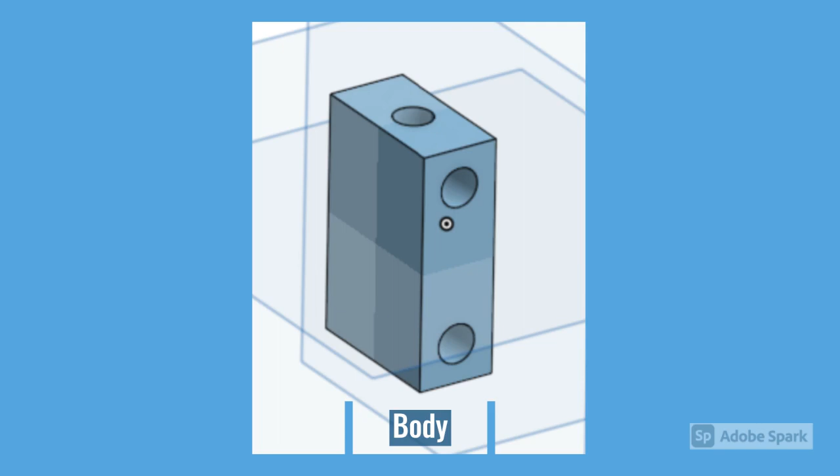It's a rectangular prism with a hole in the top for the head, and then two holes in the side for the arms and the legs. Use this dimensioned drawing to create the body of the robot. I recommend starting with a 2" by 3" rectangle and extruding that to 1 inch. This will give you most of the body.

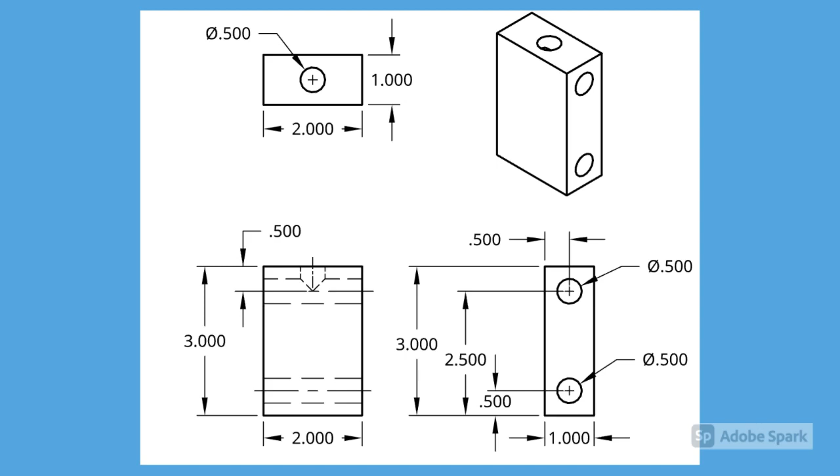Then you can add in the 3 other circles for the head, arms, and legs using circular sketches and the extrude remove tool. When you have completed the body, click on the plus sign and create a new part studio. In your new part studio, we will be creating the head of the robot. Have some fun with this part and make your own head look unique.

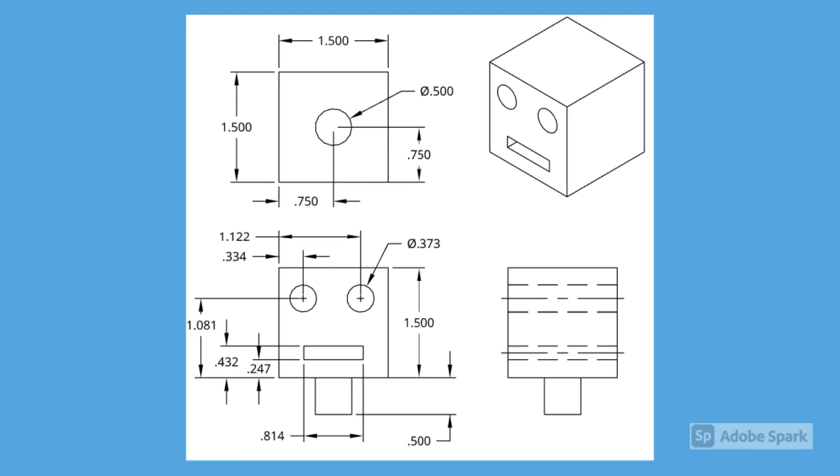Here is the dimensioned drawing for the head of the robot. I started by creating a 1.5" by 1.5" square, and then I extruded that to 1.5 inches to create a cube. I then created a sketch on the face and extrude removed the holes for the eyes and the mouth. Finally, I created a sketch on the very bottom of the cube, drew a circle, and extruded the neck.

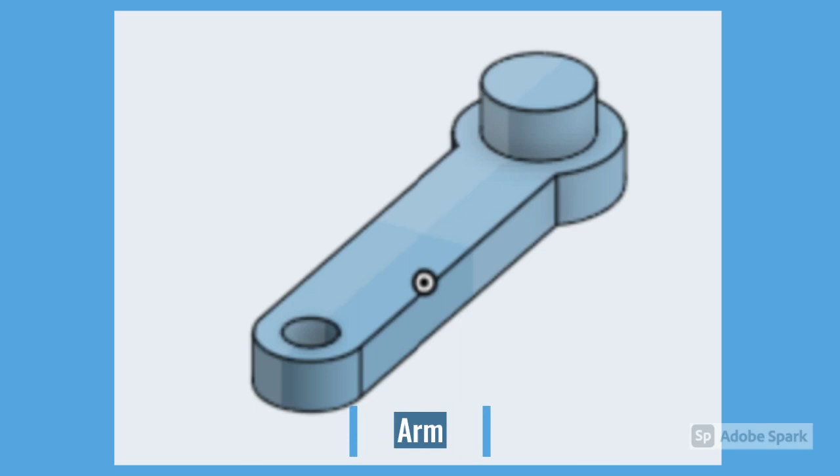When you have successfully completed the head of the robot, click on the plus sign and create a new part studio. In your third part studio, you will create the arm for the robot. Use this technical drawing to create the arm of the robot.

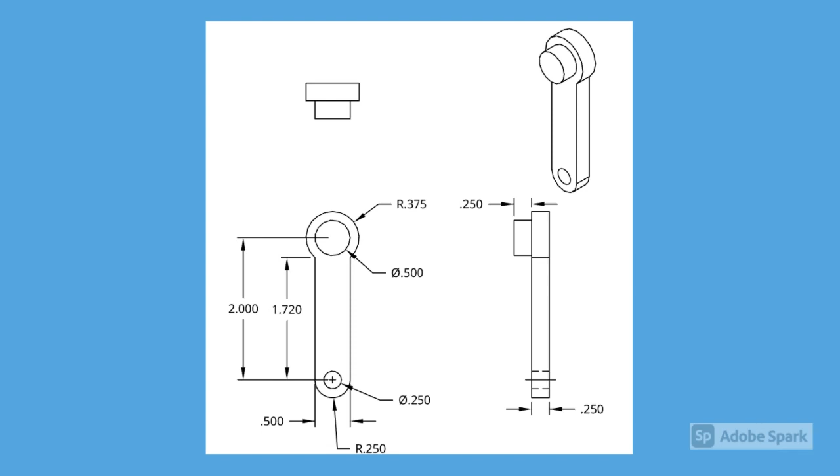I began by creating a 2" by 0.5" rectangle, and then I added a large circle at the top for the shoulder of the robot, and a small circle at the bottom for the hand of the robot. I then created a new sketch where I extruded the hole for the hand and extruded the peg for the shoulder. When you have successfully completed the arm of the robot, create a fourth part studio.

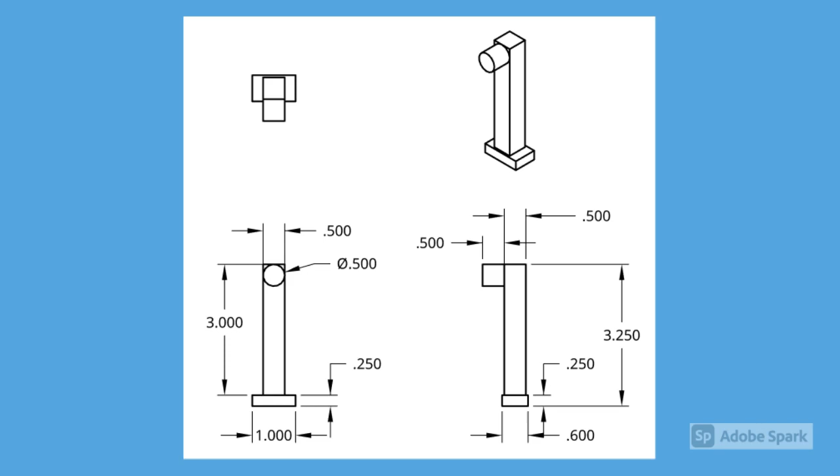The last part of the robot is the leg. Use this dimensioned drawing to create the leg of the robot. I began by sketching a 0.5" by 0.5" square and extruding it to 3 inches. Then, I created a new sketch to create the shoe for the robot and extruded that, and finally created a third sketch with a circle and extruded that for the connecting peg.

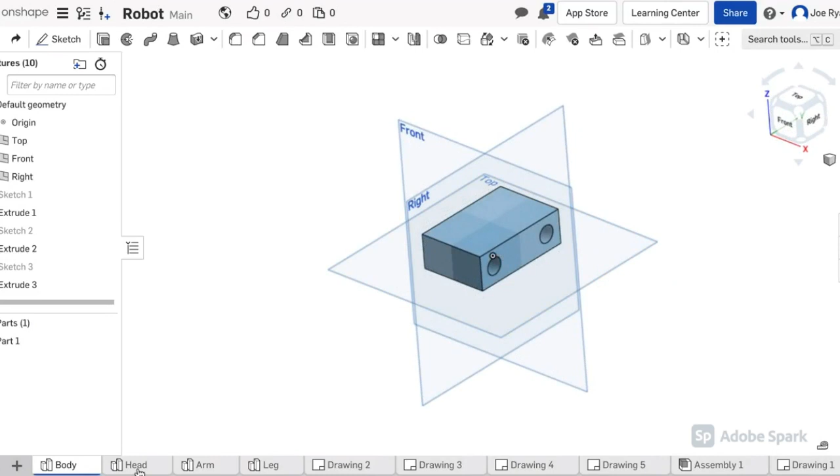Now that you have created all 4 parts of the robot, it's time to assemble it. In this section, we'll learn how to use the assembly feature in Onshape. So far, you should have created the body of the robot in Onshape. It should look something like this. Additionally, you should have created a part for the head of the robot that looks like this part.

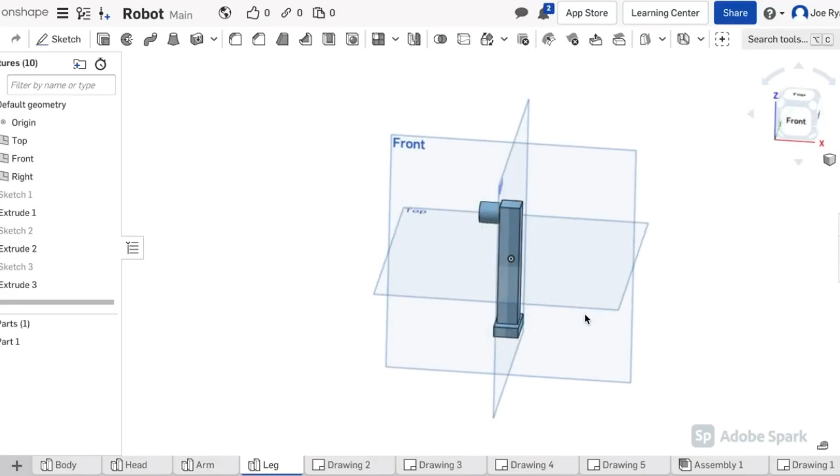Also, an arm for your robot with the shoulder and hand. And finally, the leg for the robot. You will notice on my screen that I have drawings in my Onshape document. You won't have drawings in yours, and don't worry. Those are the drawings I used to create those dimensioned sketches.

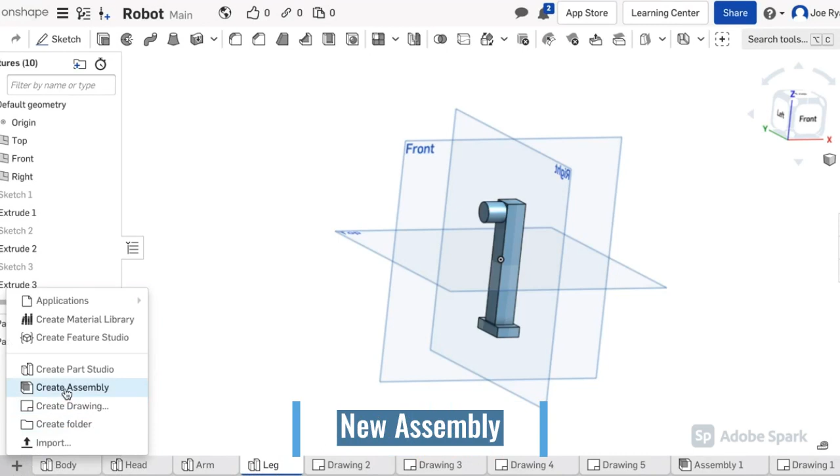Navigate to the bottom left of your screen and click on the plus icon. Select Create Assembly. This is where we will put all of the pieces of our robot together. The assembly has a workspace, a features list, and tools at the top of the screen. Begin by clicking on Insert in the upper left-hand corner. This will show you all of the parts you have created.

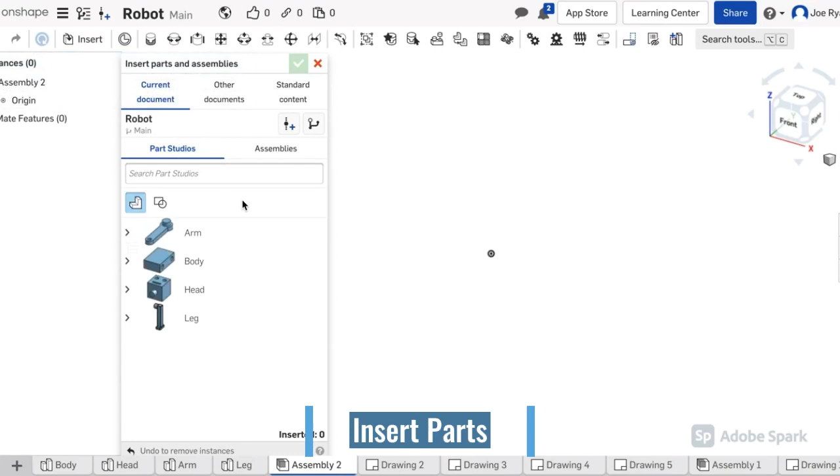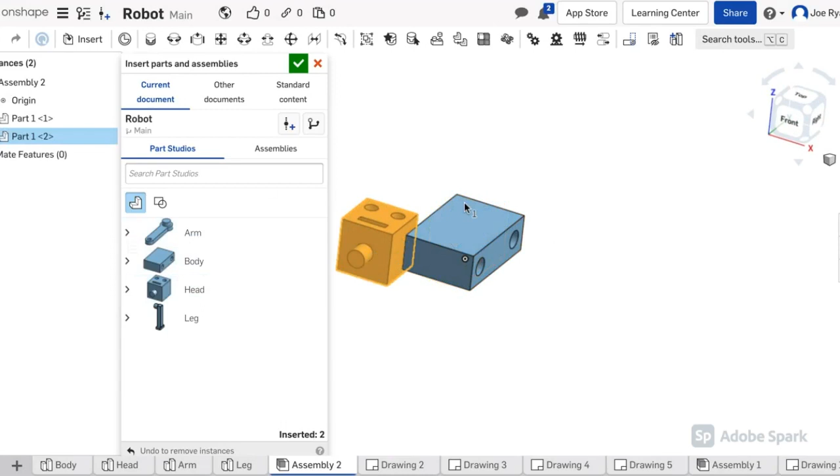To insert a part, simply click on the part, like body, and then click where you would like to insert it. Insert the parts one at a time. Once you have inserted the body, you can begin inserting the rest of the parts. Click on the head and then click once in the workspace to insert that.

We'll need to insert two arms, so I'll click on arm, click once, click on arm again, and I'll click in the workspace again. And I'll do the same thing with legs. Our robot has two legs, so I will insert two legs.

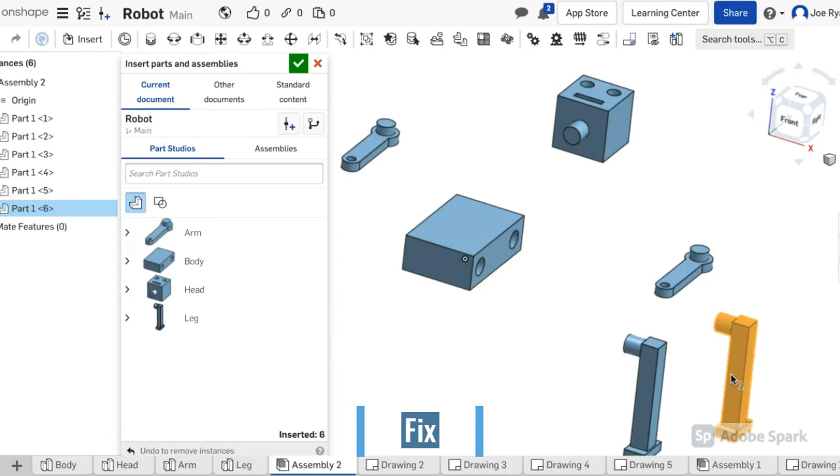Once you have inserted all of your parts, click on the green check mark to continue. Now, notice that we can drag some of these parts around the workspace. So if I click on the body and drag it, it moves. The body is the center of my robot, so I'm going to two-finger click on it and select Fix. Now when I try to drag it around, it's locked into place. This will make our lives a lot easier.

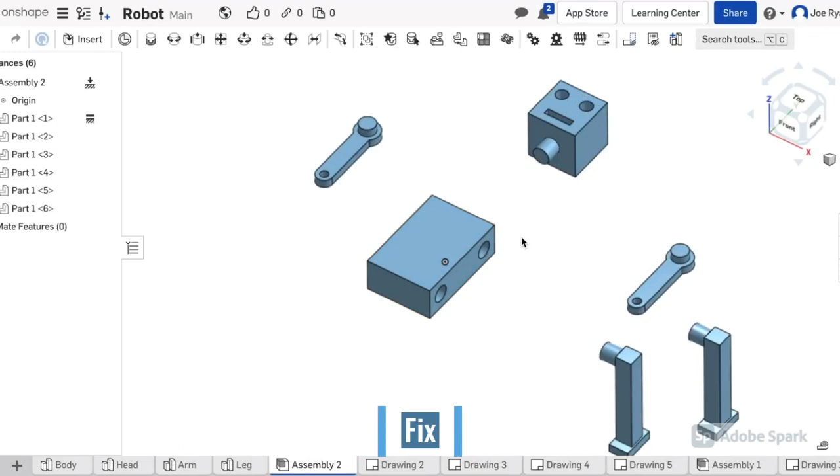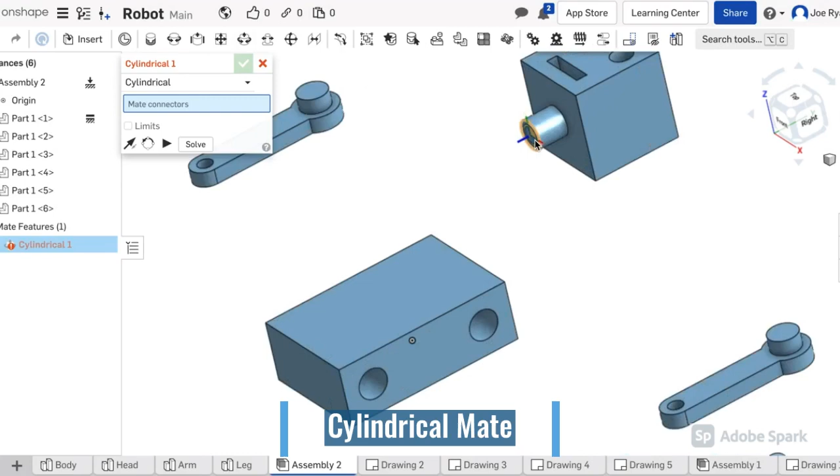Let's begin putting our robot together. We'll start with the head. I want to put the neck of the head into the body. At the top of the screen are all of the mate tools we will be using. We'll mostly use the Planar Mate tool and the Cylindrical Mate tool. Click on the Cylindrical Mate tool. Select the circle at the base of the neck. You'll zoom in and you'll see a little circle appear on it. Then select the circle at the top of the body.

You'll notice Onshape lines up both cylinders together. If this looks like what you want, click on the green check mark. Now, we can still drag and move the head around. The circles are really only just lined up together. That's perfectly fine. You can adjust the angle of the head if you so please.

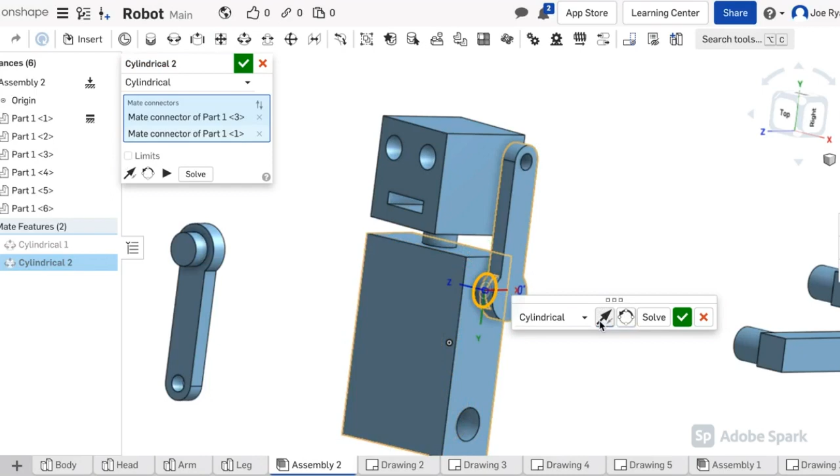Let's add a cylindrical mate for our arm. Click on Cylindrical Mate, then click on the circle on the arm. Next, click on the hole in the body. You'll notice our mate is backwards. Click on the arrow to reverse the direction. That looks better. Click on the green check mark. You can click on the arm and rotate it to get it to whatever position you would like.

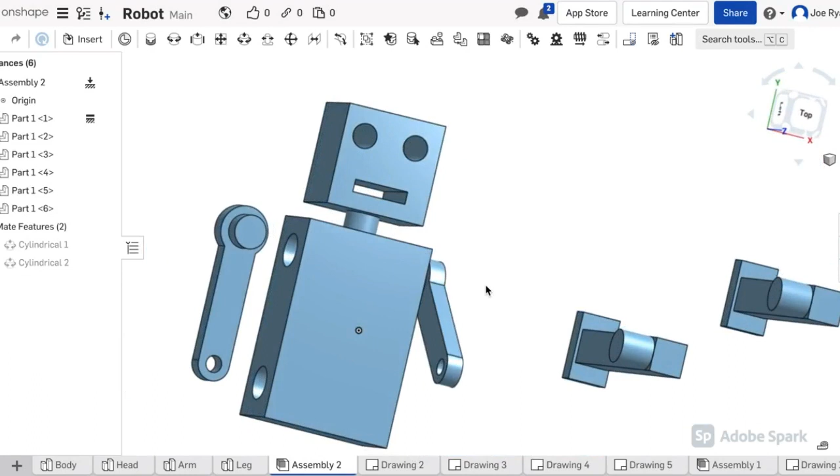Once you have moved the arm into your desired position, let's repeat the same process for the robot's right arm. Click on Cylindrical Mate, select the pin on the arm, and then select the hole in the body of the robot. Again, you may have to reverse the direction of this mate using the arrow that says Reverse Primary Axis.

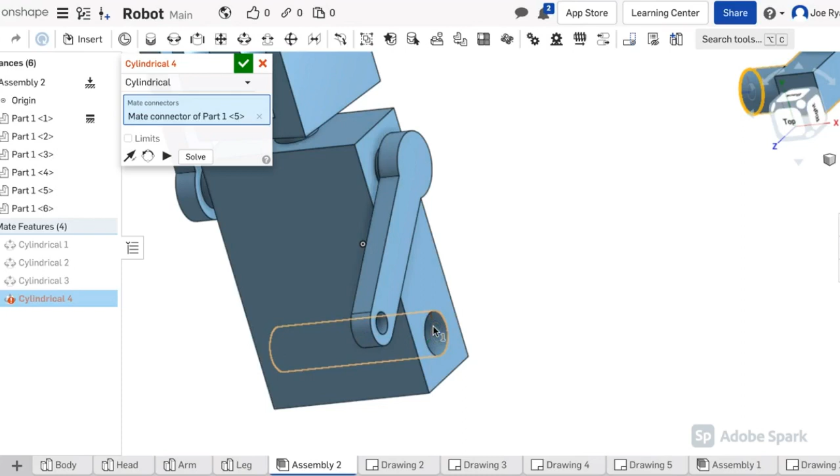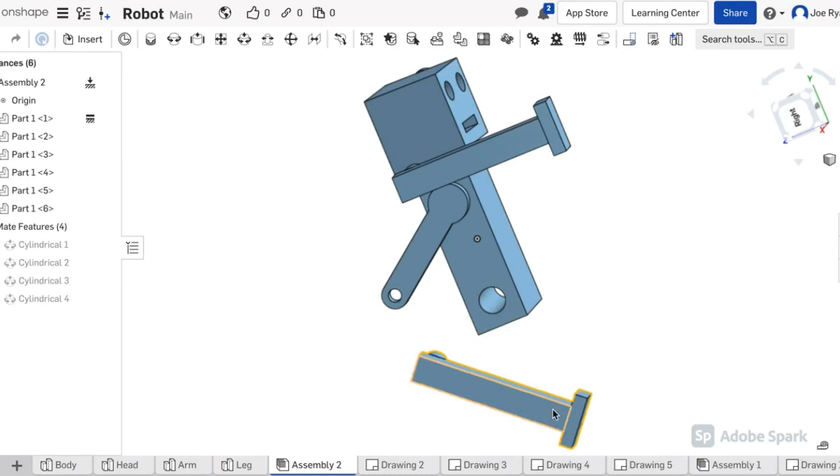Okay, we have two arms connected. Now we will complete the same process for the legs. So again, use the Cylindrical Mate tool to mate the cylinder of the leg with the hole in the body. Sometimes you have to zoom in to get the view just right. Sometimes adjusting the position of parts in Onshape assemblies is difficult. You may have to adjust your view cube and try rotating the part in a few different ways to get it lined up how you want.

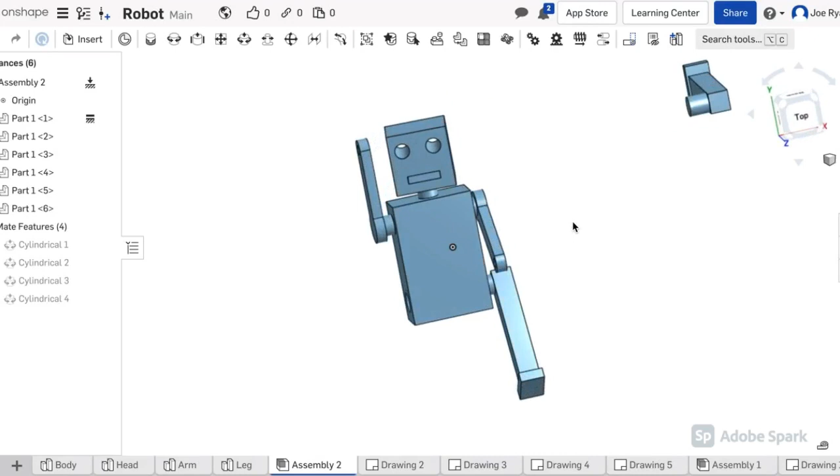We will finish up our design by using the Cylindrical Mate to connect the final leg to the hole on the robot. Sometimes the mating tool can be somewhat finicky, so you might have to X out and try multiple times to get your mate to line up just how you want.

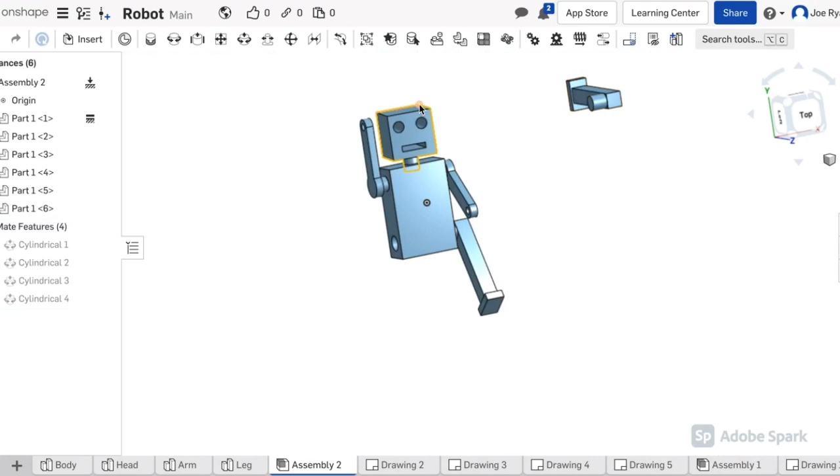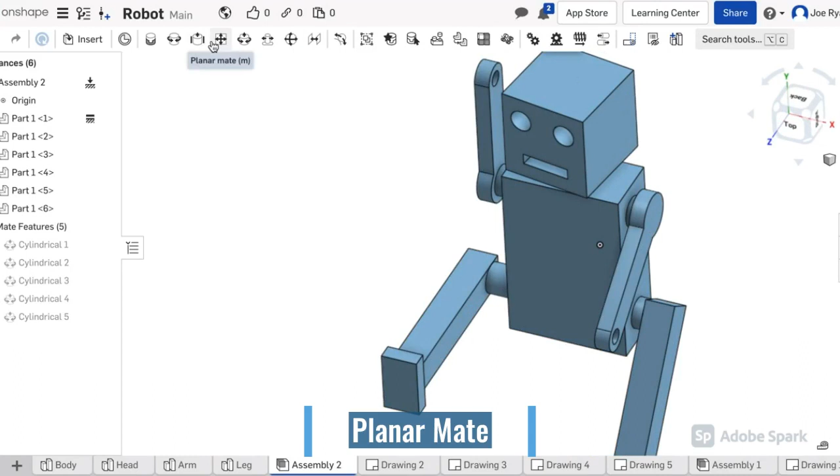Once you have connected all of your parts to the robot using the Cylindrical Mate, we can use something called the Planar Mate to sandwich flat faces together. Click on Planar Mate and select on the inside of one of the robot's legs. Click on the flat side of the robot's body and it will sandwich these two flat faces together. Click on the green check mark to confirm your choice.

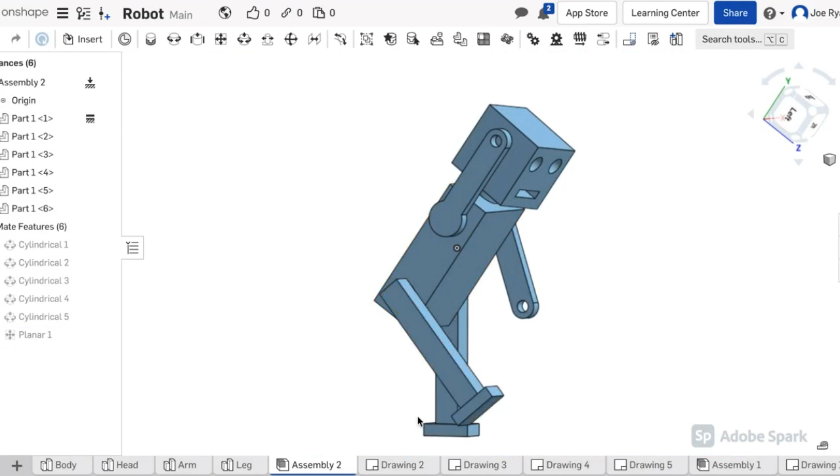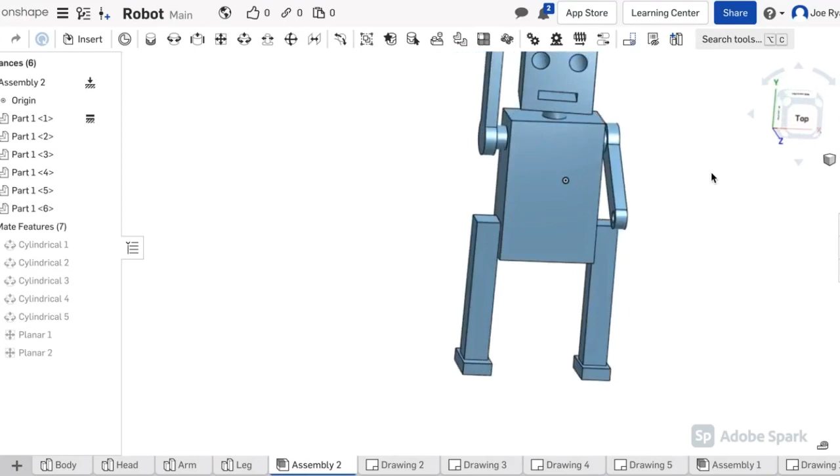We'll add one more Planar Mate to the left leg, and then you can choose to add planar mates to the arms or head if you want. So again, click on the inside of the leg, the outside of the body, press the green check mark, and there is the planar mate. Our robot looks pretty solid so far. Nice work.

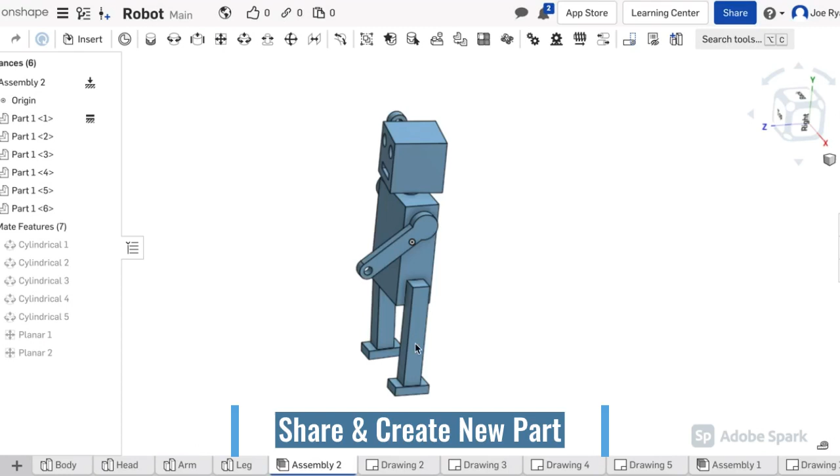Once you have finished assembling your robot, go ahead and look around, make sure everything looks up to standard, and click Share. You can share this with your teacher or a fellow student if you would like to collaborate. Finally, create a new part studio. In your new part studio, you will be creating more components for your own customized robot.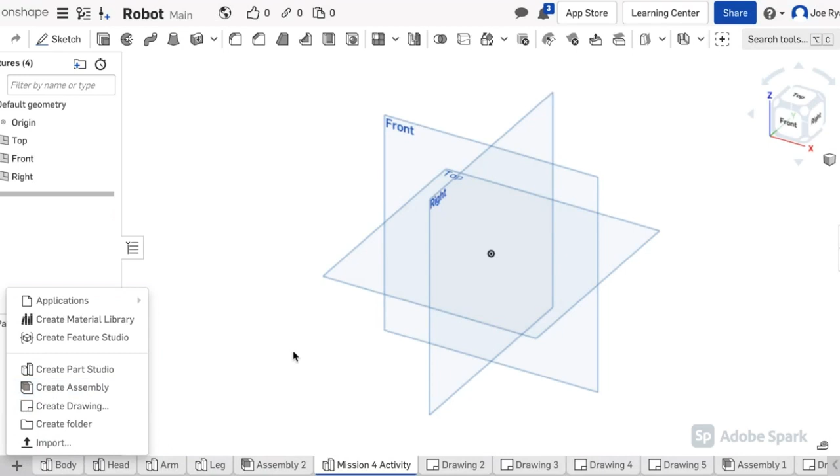Make sure to name your part studio. You'll be creating your parts in here. You'll actually create multiple part studios to create multiple parts. And you'll also be creating a new assembly for this activity where you will put together your customized robot. Keep watching the video for more instructions.

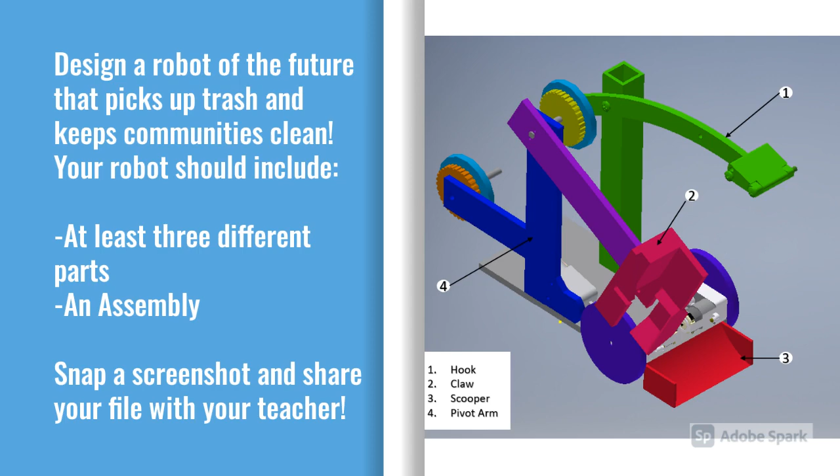You do activity: design your own robot assembly. Use OnShape to design a robot of the future that picks up trash and keeps communities clean. Your customized robot should include at least 3 different parts and an assembly. Snap a screenshot and share your file with your teacher. The image on the right is an example. Obviously, it has more than 3 parts. Your design can be much simpler.

For an optional challenge, try customizing your robot with a name using the text tool in OnShape. Hint: the text tool is available in sketch mode. It can be extruded. Thanks for watching, and good luck with your 3D model and assembly.